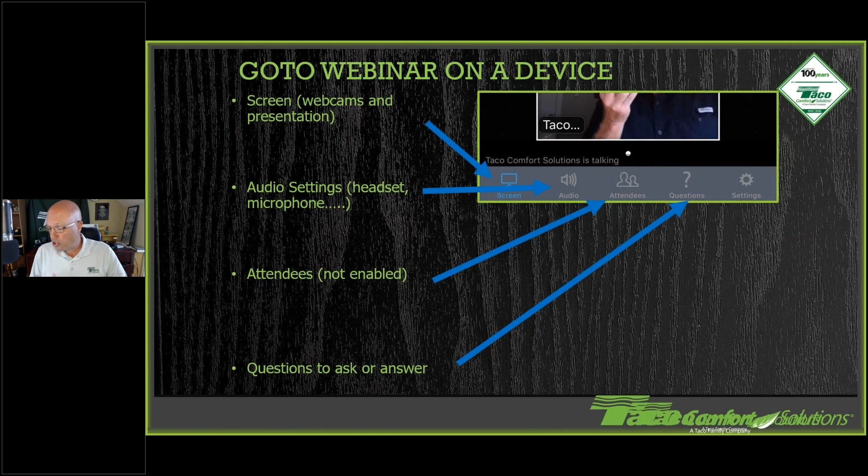So last week, just a quick little review, we talked about eliminating air. And the first thing we talked about last week was, hey, purge, get the air out. That's one of the most important things, is getting that air out of the system. And I showed you a couple of different ways on how to purge and how to pipe the system out.

Second way is pump away from your systems. Pump away from your expansion tanks and your air elimination devices. You pump away from that area. We know, as we talked about last week, this is going to be the lowest pressure in the entire system and also the hottest water. So therefore, it allows air to come out of solution much easier.

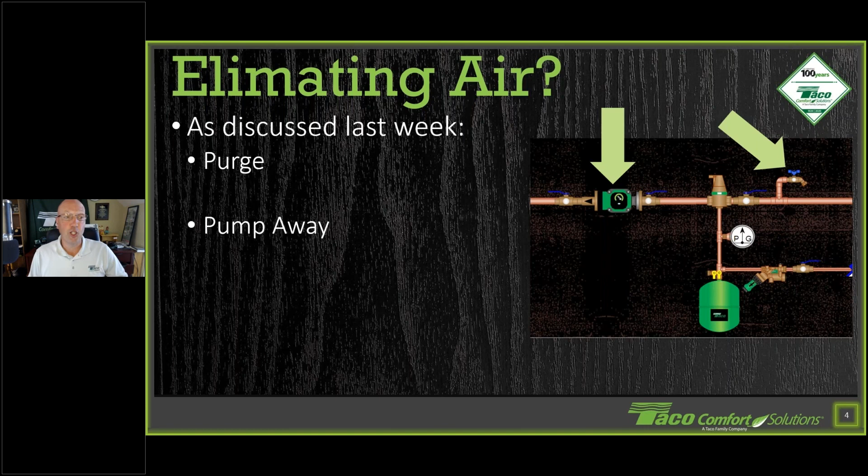Also, we talked about the pressure to maintain in a system, and over pressurizing or under pressurizing the system. Sometimes air problems look like pressure problems, and pressure problems look like air problems. So making sure you've got the proper pressure in your system is also very important.

And then the last way we talked about eliminating air last week was mechanical devices, which I didn't get into. I just said, hey, we got to get rid of it, here's another way. This is going to guarantee and really make sure your hydronic systems are air free. So let's dive into the different ways mechanically that we're getting rid of air in our systems.

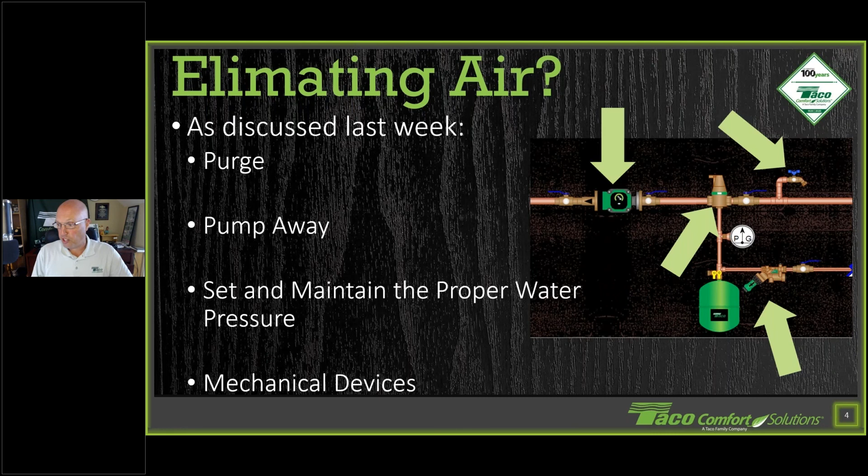All right, so some of those mechanical devices, sorry, are the basic vents. We've seen these around, and we're going to go into detail on these things today. I like to dive into the mechanical parts and pieces and really what's the guts on the inside. So we'll take a look at those.

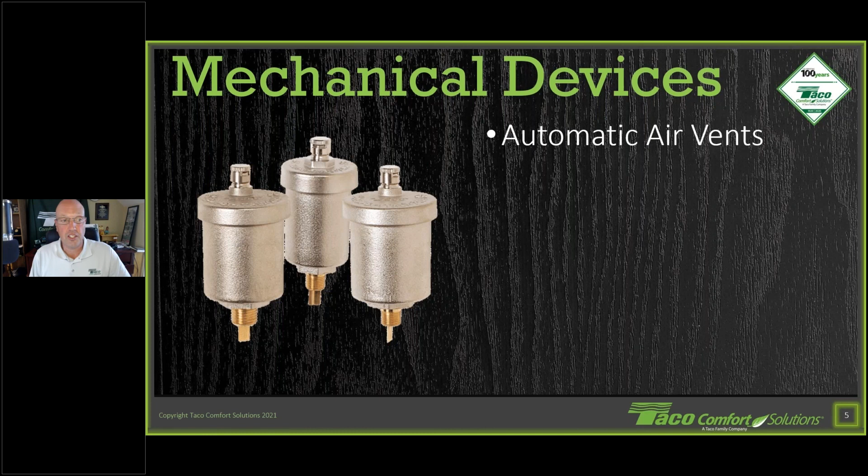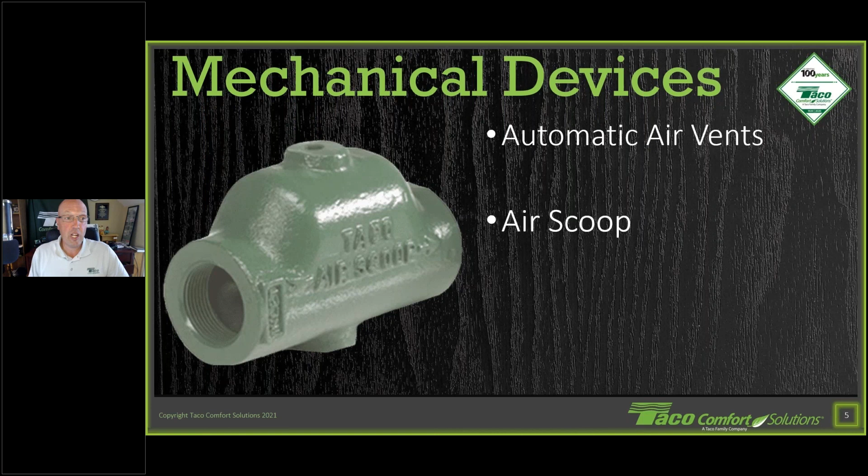We're also going to look at the tried and true air scoop. They've been around for a long time and not going anywhere anytime soon. And then, of course, there's enhanced air separation. A lot of people talk about enhanced air separation as the only way, but not necessarily. Let's make sure we understand what we've got. When you're holding a hunk of metal in your hands and putting it into somebody's house, know why you've got it. That's what we're going to talk about today.

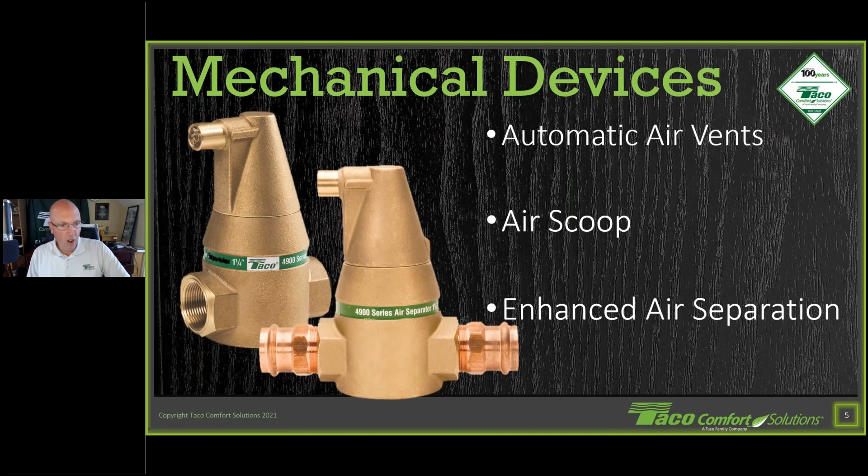All right, so let's jump in and talk about the basic air scoop. It is a basic, simple component, been around for generations. It's a big old hunk of cast iron.

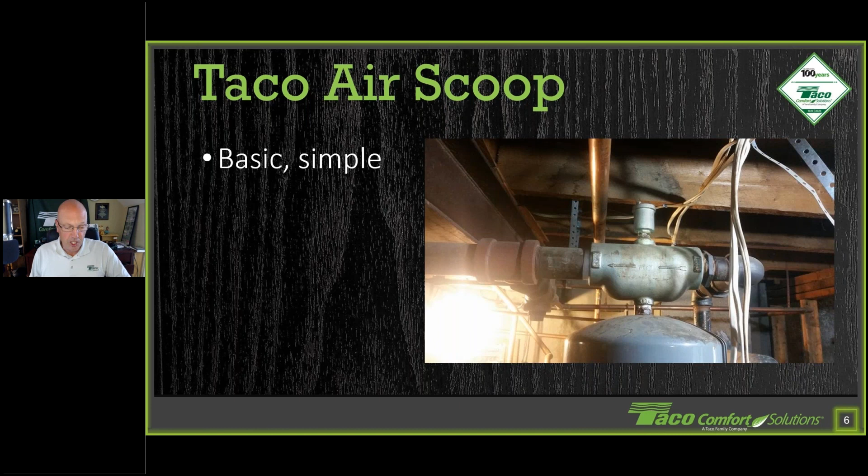All right, however, lots of times they are. Unfortunately, there's a couple of things you need to pay attention to. One is the print that's on there. What I mean by that is there's a design on this thing, and it's not just for the water flow, as you can see here, but you want to make sure you see some words. And when you see those words on the scoop itself, make sure you don't have to turn your head or twist around and contort yourself in order to read the words. Once you can do that, it's going to be installed almost perfect.

But what's nice about the scoop here is there's no moving parts. It's very hard to say, hey, this thing was bad out of the box. Other than a visual inspection of it being smashed or driven over, then you would know, yeah, I'm going to have to return this or figure out why it broke. But no moving parts on the inside here.

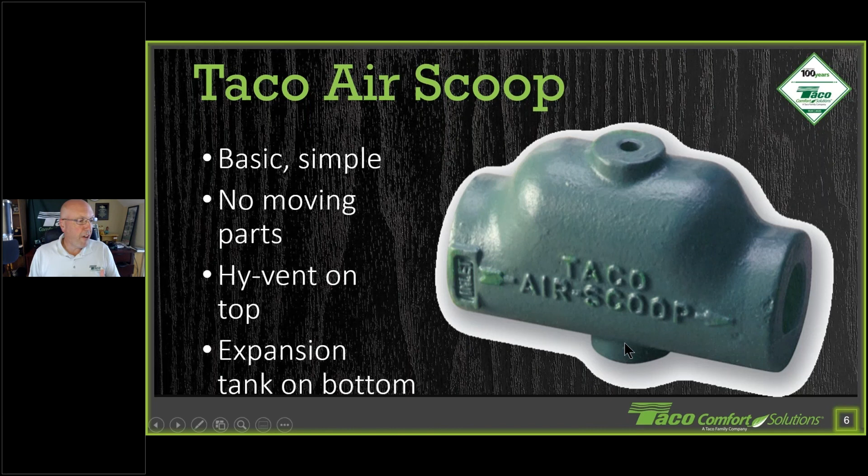Like I said before, the Hy-Vent gets mounted to the top, and we're putting our expansion tank / fill valve tapped into the bottom here. Okay, so very, very simple component, but let's take a look at it in a little more detail.

I want to describe why this shape is the way it is, which we see in so many different air elimination devices. It's that way because of how water flows. Air is lighter than water, and we want to have that air collection up at the top. The other thing we have going on in here are some scoops, and these scoops help deflect and move that air to the air vent sitting up on top here.

But also, when we stop and think about it, as we're moving water through our system, we also have a certain gallons per minute, and a certain velocity too, which is our feet per second. All of a sudden, right past this point, if our flow is going from left to right, right at this point here we have this wide open area, and there's no air in it, because the air has been removed by the air vent. We've got air that's going to be in the water itself, and we want to get that air out. So the velocity of the water has to slow down drastically.

Once it gets right past that corner there, the velocity is going to slow down. Once that velocity drops, air comes out of solution a heck of a lot easier. So this is the reason for this design, why we have this big bulb.

Flipping this thing over upside down now turns the vanes into deflections rather than scoops, and is not going to do the job for you. So that's why you want to make sure it is in the up position.

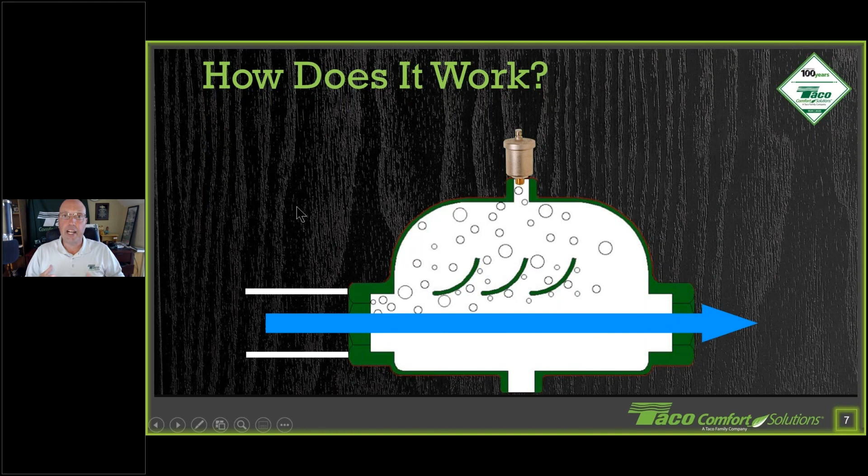Which means we want to have laminar flow of the water in the pipe itself as it enters the basic air scoop. You want to have laminar flow. Turbulent flow, which means everything is all churned up and mixed up, means those air bubbles that could be entrained in there could easily be at the bottom of the pipe here and therefore just scoot right by the scoop itself, and they're gone - back out in the system creating havoc for ourselves. So you want to have that laminar flow. When you have laminar flow, air bubbles are going to float to the top of the pipe and move along and then come into the air scoop itself.

So you want to see that 12 to 18 inches is going to get you that laminar flow. Once you have 12 to 18 inches of straight, uninterrupted pipe, you can get laminar flow, and you get that laminar flow to help this thing do its job.

Many times I see these things - you see the pipe coming right out of the top of the boiler, we put an elbow in, and then there you go, you're done. You throw the scoop in at that point. Well, the elbow is a major point of turbulence - it's going to disrupt and churn that water up, slams into the wall, gets all mixed up. So you want to have that 12 to 18 inches of straight pipe in order for this thing to do its job properly.

So that's about it. The basic air scoop, like I said, has been around for many years. I say 12 to 18 inches because it does also depend upon circulator size, speed, and also pipe size that you're feeding along. If you want to just give a general number, call it 18 inches and be safe with that, and you'll get good laminar flow as you're flowing along into the system itself.

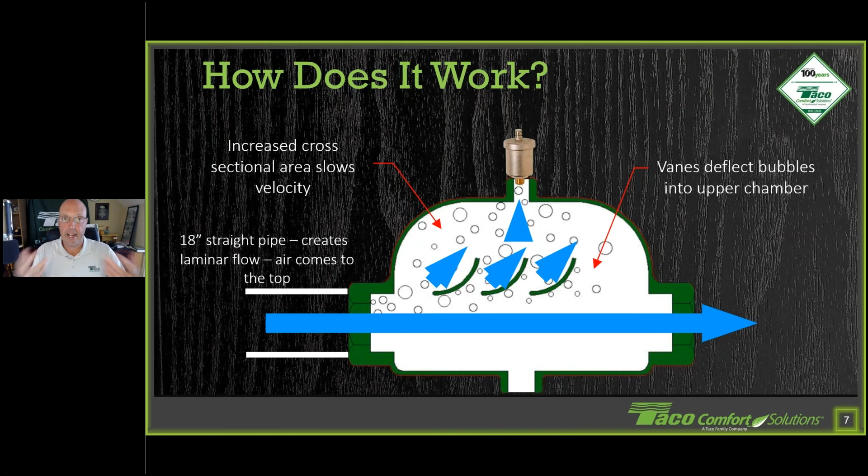So while we're talking about the vents, because you still have to have that automatic vent sitting on top of the basic scoop itself, we've got a wide variety of different vents here, and I like to talk about a bunch of these things. Maybe you haven't - we've all seen them, we've all used them before, but maybe not paid enough attention to them.

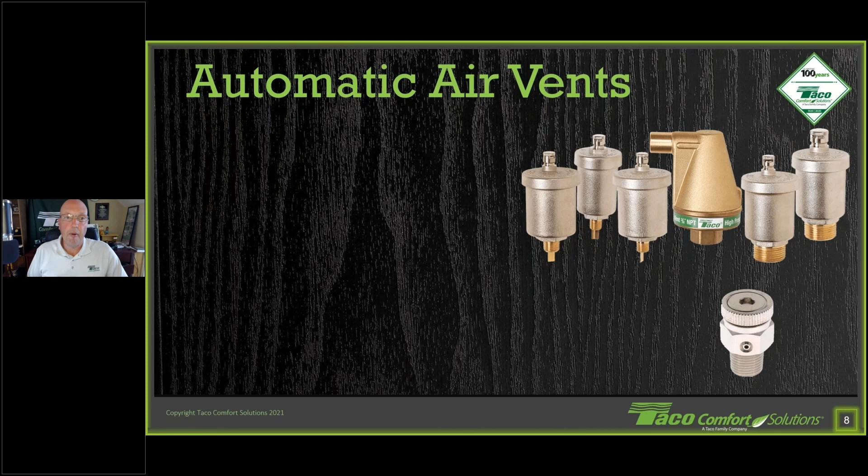So the first thing I want to point out is that we have a basic coin vent, manual operation, can also be automatic too. And I want to show you that hygroscopic coin vent operation on the inside. Then we have our Hy-Vents in a lot of different sizes - we have 1/8 inch, 1/4 inch, 1/2 by 3/4 for individual, different connections, your 3/4 outside thread, 1/2 inch inside thread. And we also have this heavy duty 409 air vent right here.

We use this in a lot of our commercial applications, and also throw it onto our larger air elimination devices for just the vent capabilities. So we'll talk about all of this as we go through.

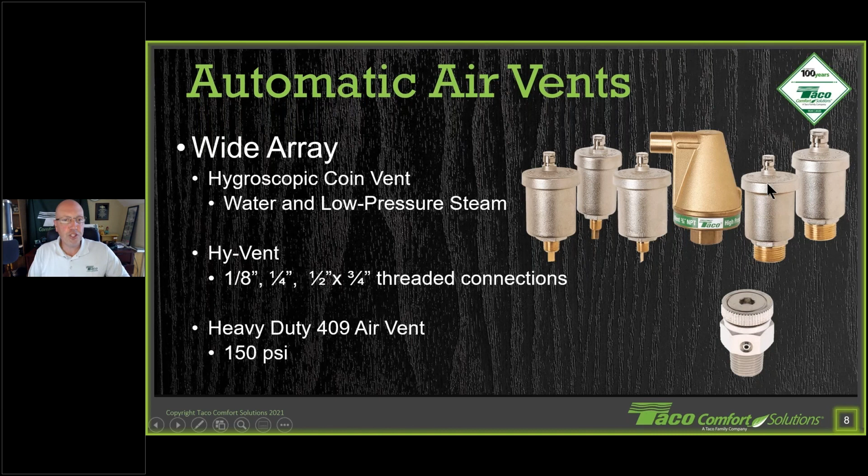First thing I want to point out is the hygroscopic coin vent that we have. This is an automatic vent, which is pretty cool when you take a look at it, but it could also just be a manual open close vent.

One of the things that's important about any coin vents, or if you have a hygroscopic coin vent being used in a system, make sure your system doesn't contain any glycol in there, because this is not looking for glycol, this is looking for a water system. You can also use this with some low pressure steam systems in the house and get that automatic venting going on.

Make sure you don't point it in the downward position. The reason why, you won't get that automatic operation because you're going to see water settle down here, so it's not going to get you the flow or get the air elimination that you're looking for in an automatic setup.

So when you are using a hygroscopic coin vent, in order to make it an automatic operation, you need to have it tightened down. When you close that down, then there are little discs in here, and these discs expand and contract based upon moisture. When they're dry, they constrict, and that allows the air passage to happen.

On say a steam system, it's going to allow air to come in once it dries out, and that's what we want. We don't want that to eliminate that airflow coming in, but it's also going to allow the air to come out. And once they start getting wet, that's when they expand and seal up and keep everything on the inside.

And even in a hydronic system too, if it experiences any moisture, it's going to expand and close off the flow.

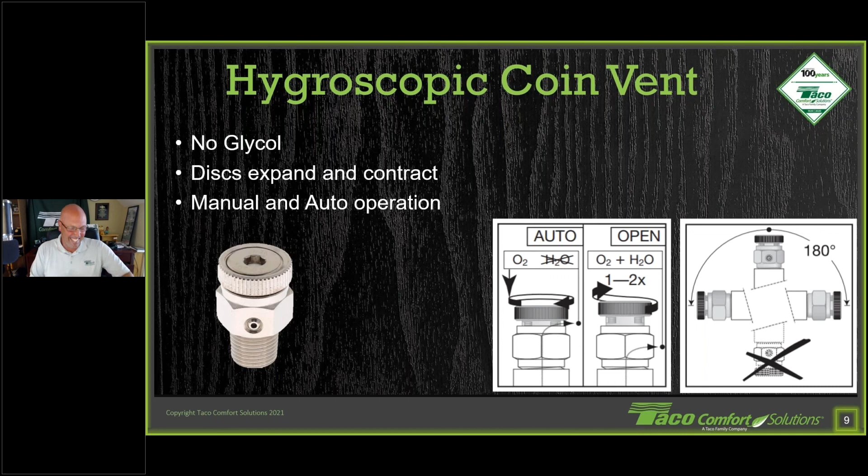Awesome. Anyways, let's jump now into the Hy-Vents themselves. The Hy-Vents themselves, you know, it is an automatic venting system. You got a couple of components that you see in here.

You got the cap, open and close. You want to close that down to shut it off completely. You just need to give it about a quarter turn and it's open.

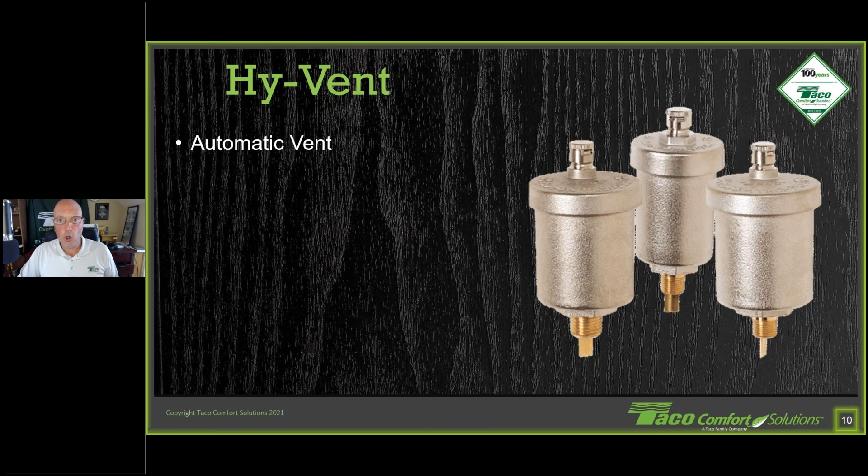Another thing that we have built into these things is what we call a bubble breaker. It's just a piece of metal sitting out of the bottom here, and that bottom piece is for any large bubbles that it might see in the water flow if it's in pipe. If you mount one of these things in a simple T-style system, it's going to try to break up that air bubble to make sure it can come up inside of the vent itself.

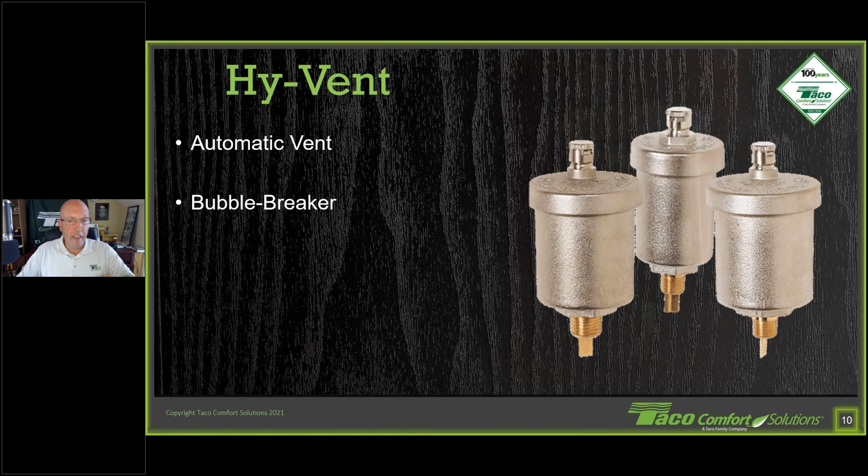And the chamber itself, you know, there's a lot of space inside here. Believe it or not, I'm going to show you a cutaway of the float mechanism that we have on the inside. So it's going to hold a lot of air, quite a bit of air that can be held into these things. And I felt one of the most important things that we have with this thing is that we don't have a Schrader valve.

For those of you that have touched Schrader valves, why do I consider this pretty cool, not having a Schrader valve? Let me know what you think about that for a second. We don't put a Schrader valve in this thing, and I'm going to hold off on that, see if I get an answer on why Schrader valves are sometimes scary to have in a hydronic system. I'll come back to that.

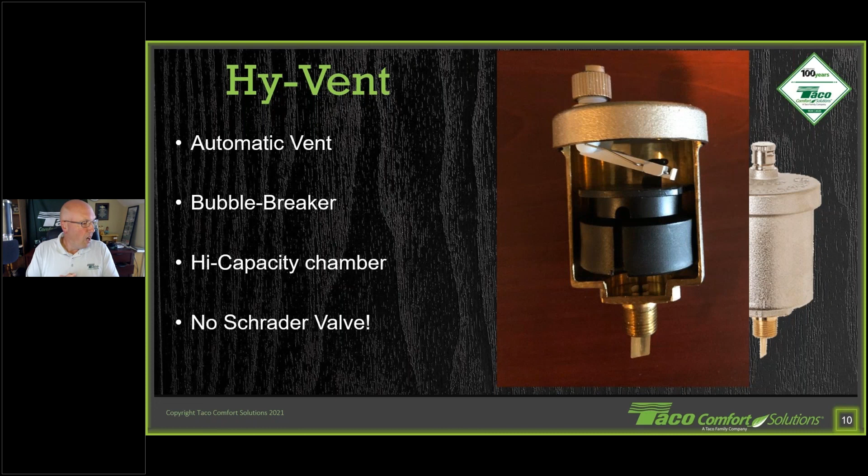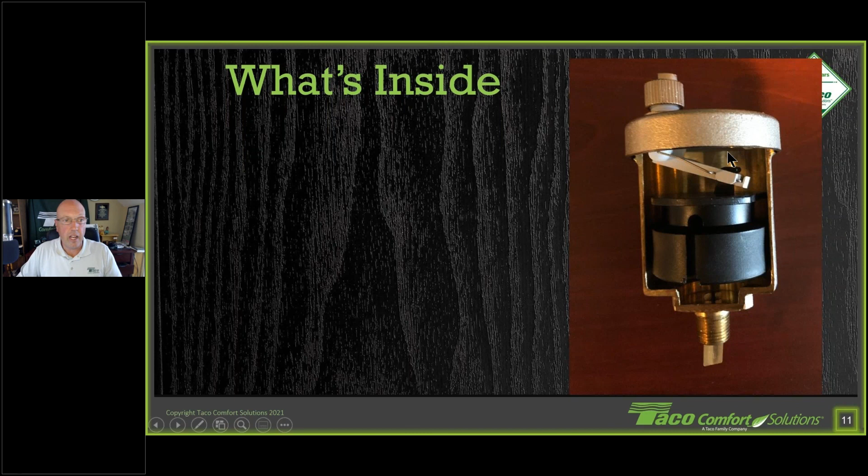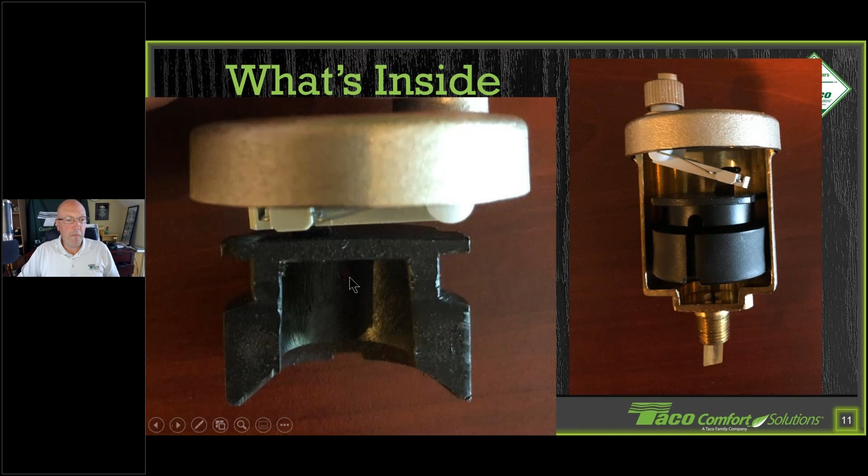So what's on the inside? Like I showed you before, here's our float mechanism, and it actually slides up and down onto this little hinge point, which is a spring connected up here going up and down. Now when I take a look at the inside of the float mechanism, it's not just a hunk of plastic, it's actually hollow on the inside. And being hollow is how it's able to keep that valve closed, believe it or not. It's got a little bit of air sitting up in the top part of this float to help push it up, and when it pushes it up, it makes sure it's got a sealing point.

Now when the center part starts to overfill, there's a little hole that you can see here, and there's also one opposite 180 degrees right through here, that air bubbles will escape out to and then start flooding the entire outside area. And then as more and more air enters in, it pushes down on that vent.

So what is a Schrader valve? I see a question came in from Luis. A Schrader valve is like the valve that you see on a tire, where it's got the pin on the inside. You push it down with your air chuck to put air in. It's a valve, it's just a little pin with an O-ring around it.

For some people, some systems and some job sites, as soon as you touch that Schrader valve to manually let some of that air out that you think might be stuck in here, then all of a sudden it lets the air out. But what else does it let out afterwards? What have you let out after you've hit the Schrader valve when you let a little bit of air out? A lot of times, a little bit of water starts coming out afterwards, and then it doesn't stop. So now, just like you were testing it out to make sure it was good, making sure there was no real major air in the system itself, now you've got a drip on your hands and other things you need to fix.

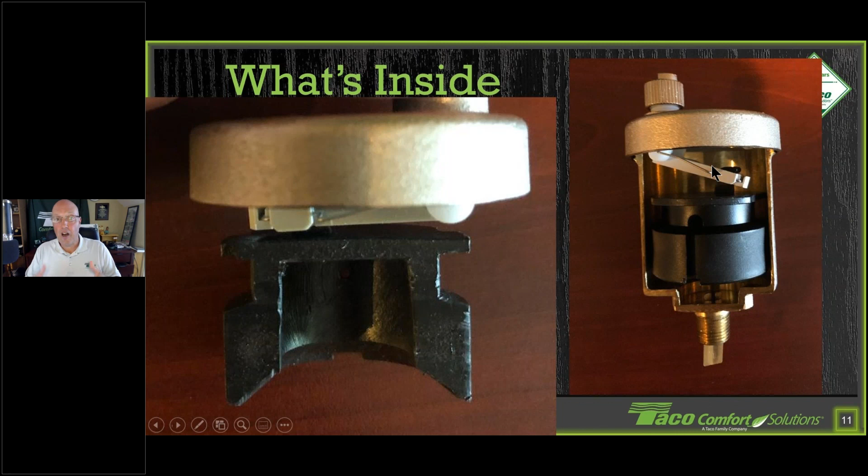That Schrader valve with that little O-ring in there can be troublesome, and you need to make sure you have another vent around in order to replace it. Because one thing to remember is that a lot of the oils and the crud and everything else we have in our boiler system is going to float on top of that water. Since we don't have any real air in there except for what might be in the air elimination device, there's going to be a water-air layer, and a lot of that stuff can settle out and start fouling up any valves that you have. So that Schrader valve is one of those things that's going to get attacked pretty easily.

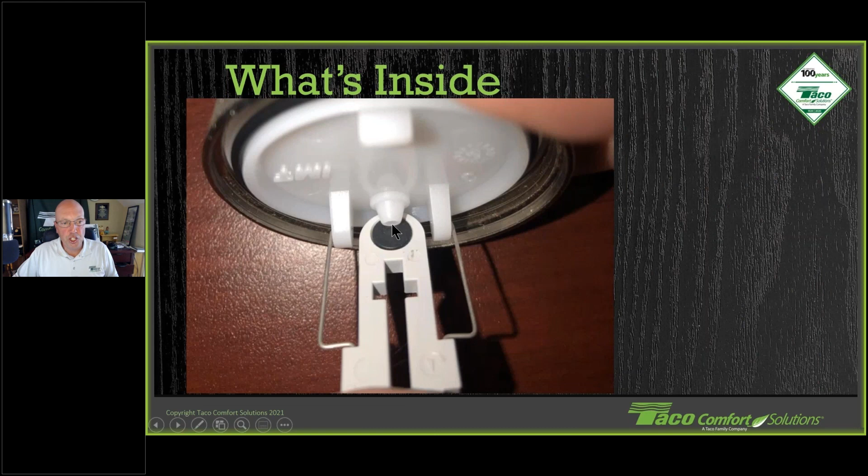So by not having a Schrader valve, it's just a positive shutoff, a rubber disc. I'll show you next what it looks like on the inside, to help avoid those leak points. Okay, so here's what we look at on the inside. This is just a straight-through hole right up to the top here. I can even show you in the camera if we can get a good focus on it - that hole just goes straight through to the cap.

And there's just this rubber seat. So if you happen to have a Taco one and it does seem to be leaking some water out of that cap, what I would do is drop the pressure, drop the temperature in the system, take it apart and find that little mechanism. And there it is - that's just a little rubber sleeve or disc you could wipe clean if it doesn't seal right, since any of that stuff floating in the water can prevent it from getting a good positive seal.

But like I said, that air bubble sticking in the bottom here is going to help that out and try to keep this thing closed as best as possible. Hopefully that helps you guys out and understand what's happening on the inside there.

So I thought it was pretty cool once I started taking these things apart and making cutaways, and just knowing what you've got on a job site is going to help you. Take these things apart—I know a lot of people consider these a consumable and just rip them out and put a new one back in again. Sometimes in 5 seconds you might be able to take that cap off, get inside there, and just wipe it down, and you've got another working system again. It doesn't necessarily need to be replaced every single time, as long as we know, hey, it might just be a little bit of oil, a little bit of something sticking on the top there.

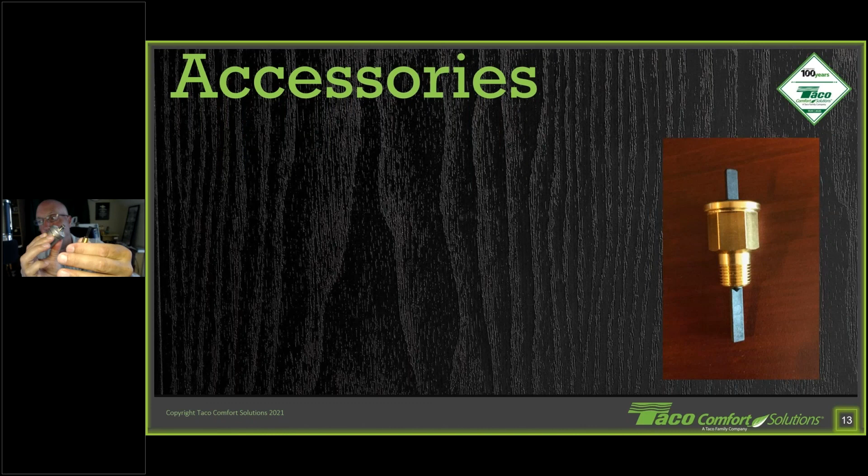Then when you go ahead and install this into your system—again it's got a new bubble breaker, and here is the check valve part. Right now it's pushed down, but if I were to start to take this one out, make sure you leave the check valve in, and as we start screwing down, it's going to give us a positive seal, and you can go ahead and replace what you have. So that accessory can be added along, or purchased separately.

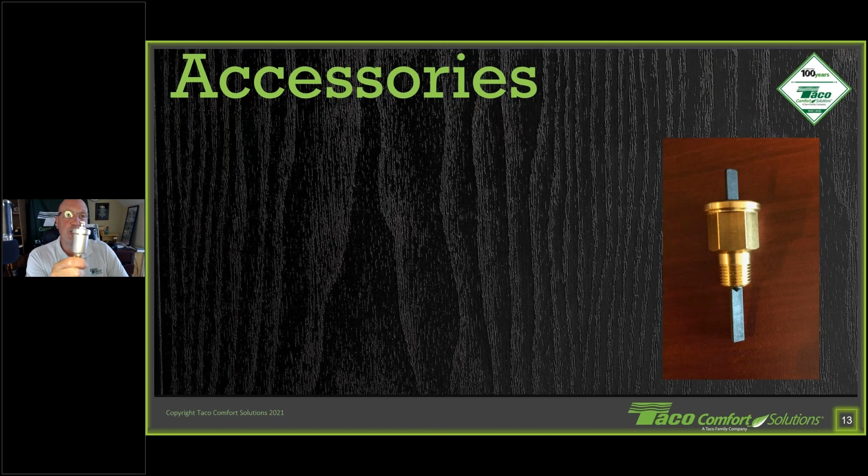Now, another thing that I really, really like, especially when these things are mounted not in the boiler room but someplace else around the house—we actually have a drain connection that you can put here. So rather than worrying about any of those fluids and oils getting in here and keeping the valve mechanism open, you can take the cap off and then screw this piece onto here and transfer over to a hard pipe or a vinyl tube or whatever, and make sure you vent it or drain it away from anything that can cause damage, like sheetrock, when it's in an inconspicuous area you don't see on a regular basis, like if it was up in an attic space. So we do have that.

So you just put this little gasket right inside here and screw it down. Now you've got a 1/4-inch NPT transferred over, and rock and roll and do what you need to do from there. Here you can just see the other side of it—this is what we'd be looking at on top, mounted right down onto that screw mechanism.

Now, I do like to ask this one question: what do you guys like to do with these caps? Do you like to leave them open, or do you like to leave them closed? Something interesting to stop and think about. Sometimes when I do these training classes live and ask that question, we'll get 50% of the room one way and 50% the other—we're almost coming to blows. So being that we're online, hopefully nobody's coming to blows, but what do you like to do with that cap is what I'm asking you out there. So tell me, do you like to leave it open or closed? And I like both—how's that for an answer? That covers pretty much everything.

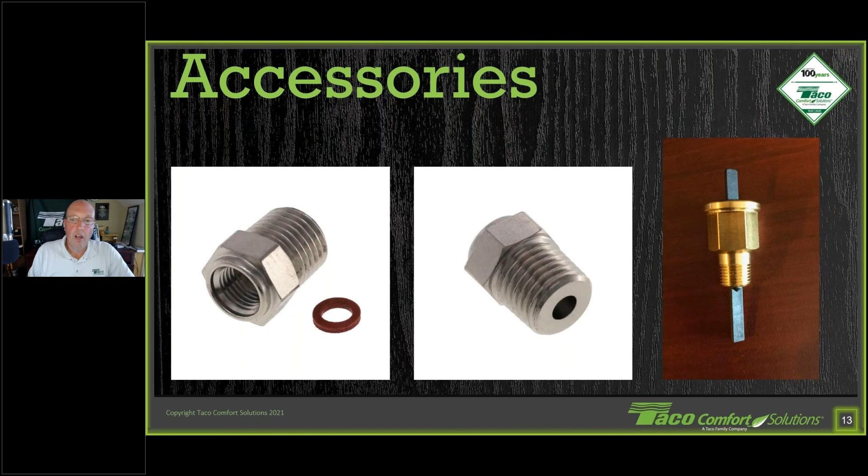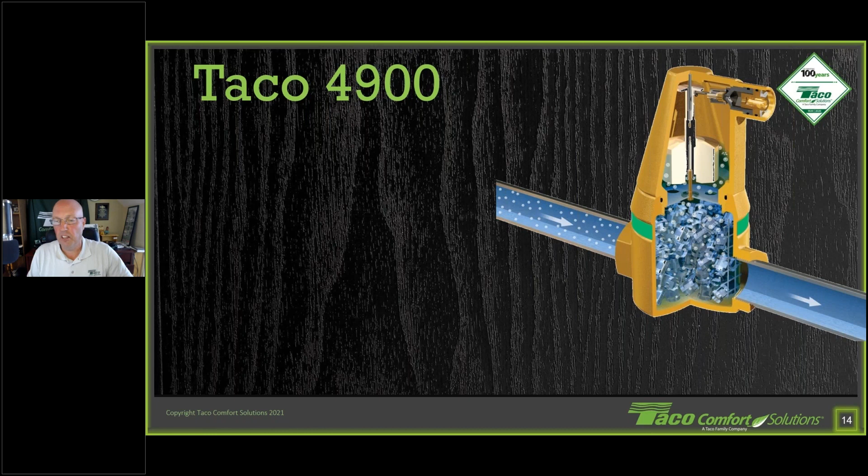All right, as we move along and jump into the 4900, the Taco 4900, our enhanced air separator. This thing is just amazing in trying to eliminate the air. It's going to pull out so much air because of the designs that we have in here. Again, we have the big cavity, the velocity slows down, and air comes out of solution a lot easier at that point. We also have stainless steel mechanisms, parts and pieces on the inside there.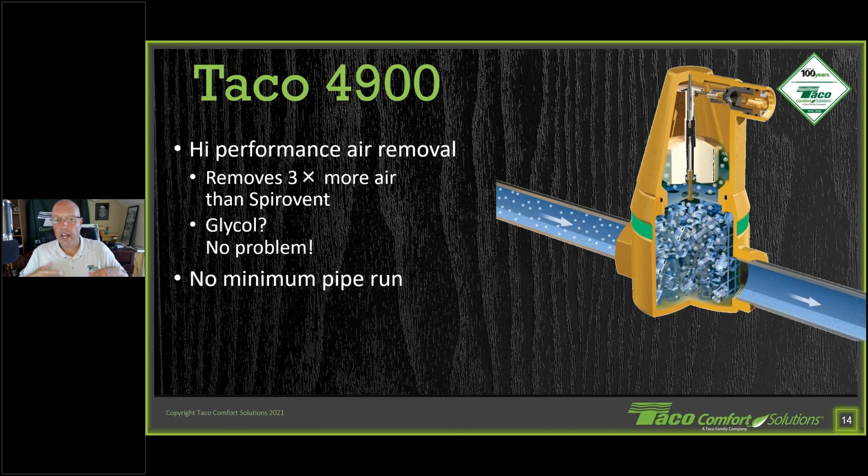So if you have a glycol system, we don't have any worries over time. And what's also nice about these things is, one, there's no arrow on it, not like our basic scoop. There's an arrow there, and the reason for the arrow is to make sure that you've got your scoop in the proper direction. But here we also have no arrows, and we also have no minimum pipe run.

You don't need to have that 12 to 18 inches of straight pipe in here, because one of the things that we've done is added these Pall rings on the inside. We've added in a collision media, which means air is going to collide with these Pall rings. These are stainless steel rings on the inside, and the water can change direction relatively quickly inside the chamber.

But then the air bubbles are not going to keep up with the water moving to get to the other side. They collide with the Pall rings. Little tiny air bubbles glom onto those Pall rings, because now we've got a lot of surfaces on the inside. Then two little tiny air bubbles combine next to each other, you start getting bigger air bubbles, and then the air floats to the top and is let out by the venting chamber up top. So those Pall rings really, really help get the air out fast and easy.

These things are worth their weight in gold. How many people really, truly enjoy purging? Hands up. All right, and if you raise your hand, thank you, if you did that sitting there by yourself. Nobody really does enjoy purging, right?

What I like about putting in an enhanced air separator like this is that you burp the system, get some basic water flowing into the system itself, and then let this thing do its job. It's just going to continuously pull that air out of there for you. And take a look at it, we have very, very high CVs here, so very minimal pressure drop that you're going to see. Same thing with the basic scoop, it also has a very high CV. I don't remember those off the top of my head.

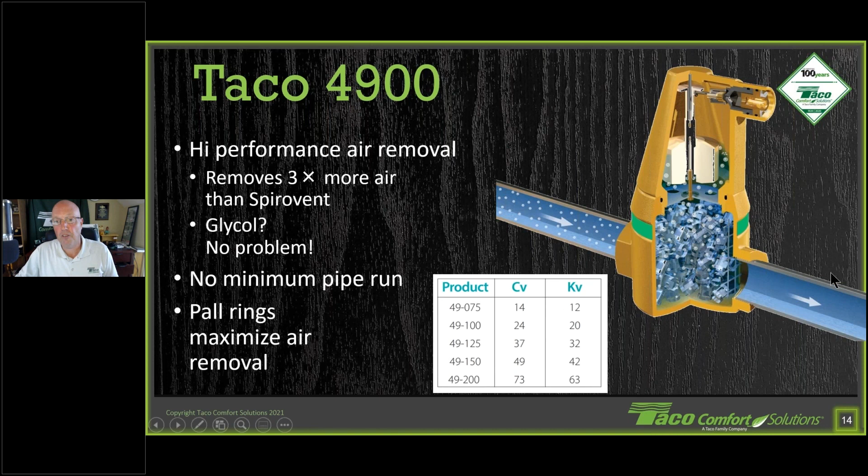We roll the steel ourselves, and we have the basket of these Pall rings that get included in there. So here you can see a little bit of that Pall ring itself. It's just some stainless steel with some tabs that are bent around. The little air bubbles enter the inside, and they're just laid in a basket. So there's lots of different openings on where the air comes in, and then they get larger and just float themselves out.

So as you can see here with this little animation that I got going on, you can see how the air comes out of solution, pushes down on the vent, and the valve opens up to get that airflow again. And how'd you like that, JB, huh?

That's a new addition that I found. That's pretty cool. I like that. I like that.

So, looks like a dragon. They're really going to pull that air out fast and easy.

It is amazing as you're cleaning tools up for the day. I like to jack the pressure up in my system as high as it'll go when I start. And this thing is going to start just hissing out that air. As you're cleaning up and putting things away, you just keep on hearing it. The pressure starts to drop in your system, and then you get it down to your working pressure when you hear it not really hissing any longer.

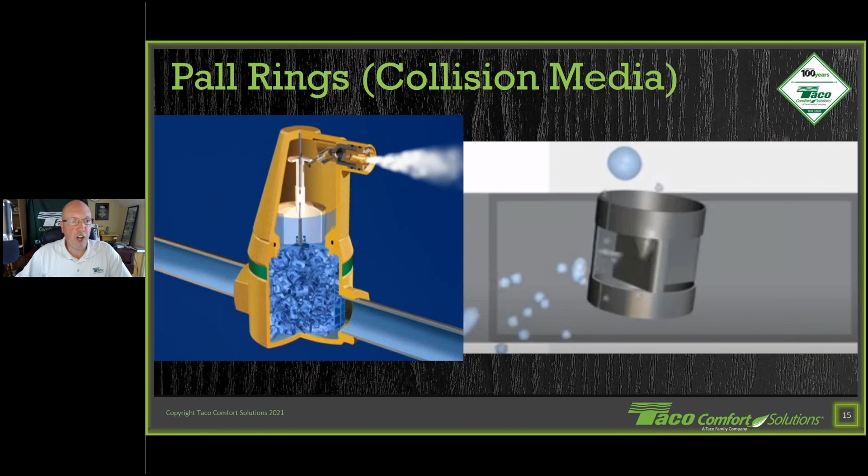So let me talk to you about a couple other things with the 4900, which I think is just also some really cool designs that we put into here. So the first thing is this conical shape. Why do we have that conical shape sitting up on top? So many of them out there have a flat top, basically a tube sitting there, but we designed it to have this conical shape.

Really important, remember what I was talking about with the 400 style vents. Why don't we have a Schrader valve in here? Because we don't have the cleanest water possible. Same thing here. Same thing here.

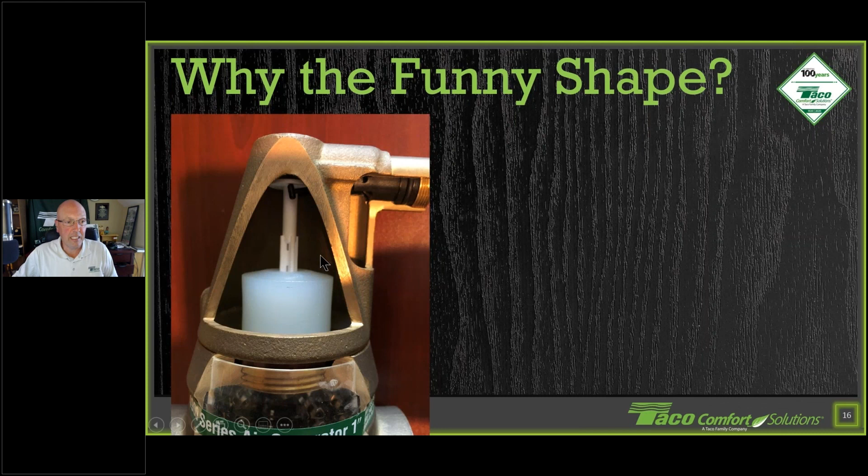The reason for this conical shape is to actually leave more distance between the surface level of the water to air to the valve mechanisms that we have sitting up on top here. We don't want to get them fouled up. By getting them fouled up, we're going to have leaks, it's dripping, things like that. It won't get a positive seal, or it may not positively open to let enough air out. So by having that conical shape in there, we're still going to leave air in here, but we just create the distance between the water air level to the mechanisms a little bit further away.

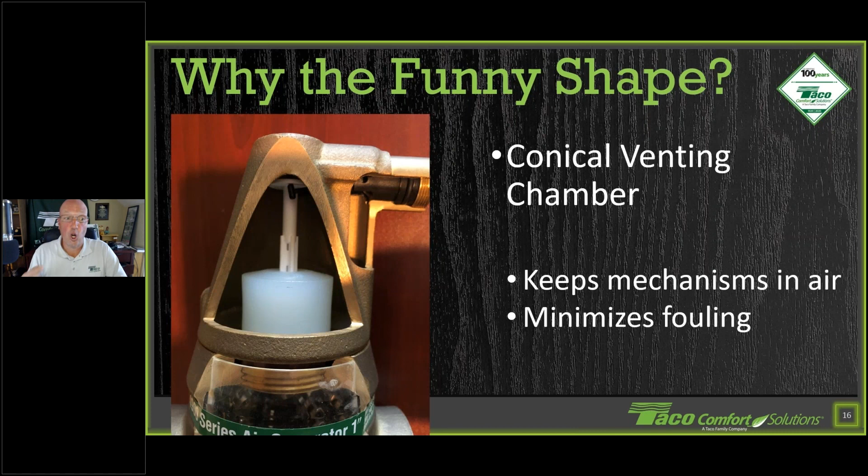So that's why we have this weird shape to it. It's not just to make it look different. It actually serves a major purpose that I think is really critical and gives these things really, really long life behind them. A couple other cool things that I want to point out that we have.

If you noticed in a basic 400 vent, you want to leave these things relatively parallel and perpendicular and stuff like that. You don't want to have them too cocked around, because now your float mechanism might end up riding along the brass on the inside in there. And if it's got too much of an angle on there, it may not move properly.

Very inexpensive devices. Like I said, a lot of people consider these consumables. So what we did on the inside of this one here is that we actually have a couple of guides. So you have a guide here that's going to hold everything in place, that allows the float to go up. And then we also have a guide down here on the bottom that's on top of the basket of your Pall rings to help the float also just go up and down, so it's not going to bind or get stuck anywhere.

So a little bit of extras that we've added to make sure that if you don't have it perfectly level, that it's going to still go up and down and do what it's supposed to do. I felt that's a really cool design once you really dive into it and take a look on the inside.

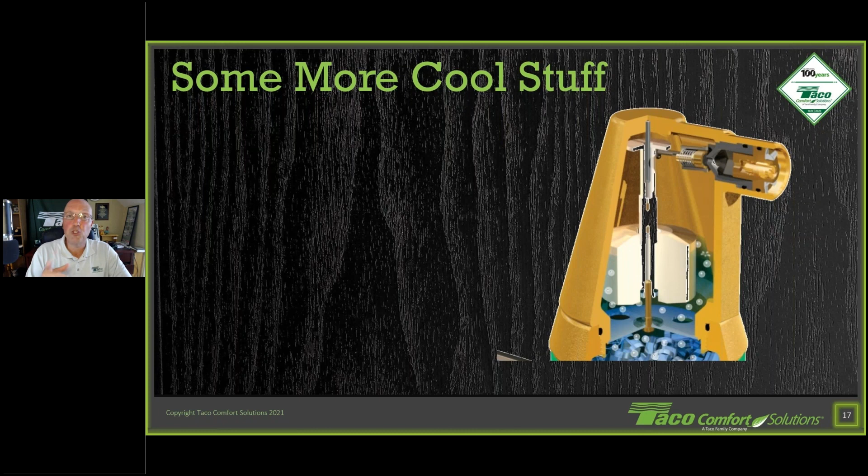And then the other part that I thought was really neat and interesting, underutilized, and people don't know it's there because you didn't look at it - right here on the end, we do have a positive shutoff. Just get yourself that little screwdriver that we have.

I think I got mine right here. There we go. All right. Get yourself your little screwdriver. Tighten that down and you've got positive shutoff again.

Again, a big chamber to hold off some air, that holds that air inside there, but you can shut it off. I like to shut it when you're starting to do that initial purge, because otherwise this thing starts bouncing up and down. And when it's bouncing up and down, it's spraying out, in and out, in and out. And you're going to churn up a lot of that water on top in here. And of course, that's your initial fill, which has the dirtiest water in the system.

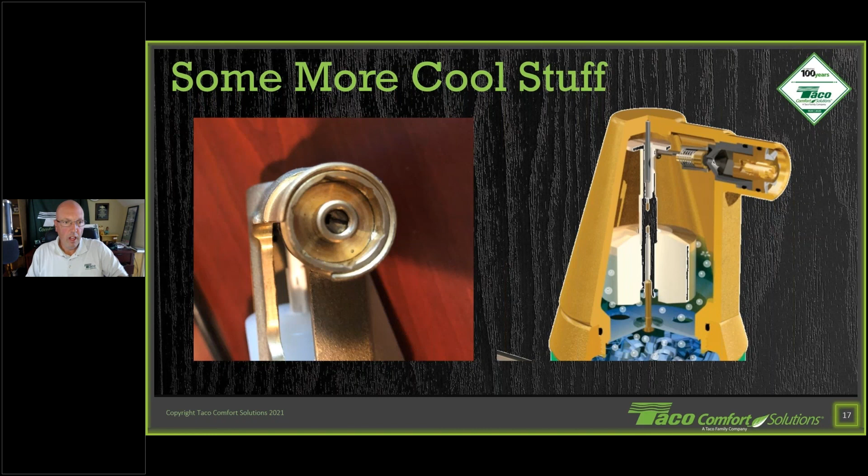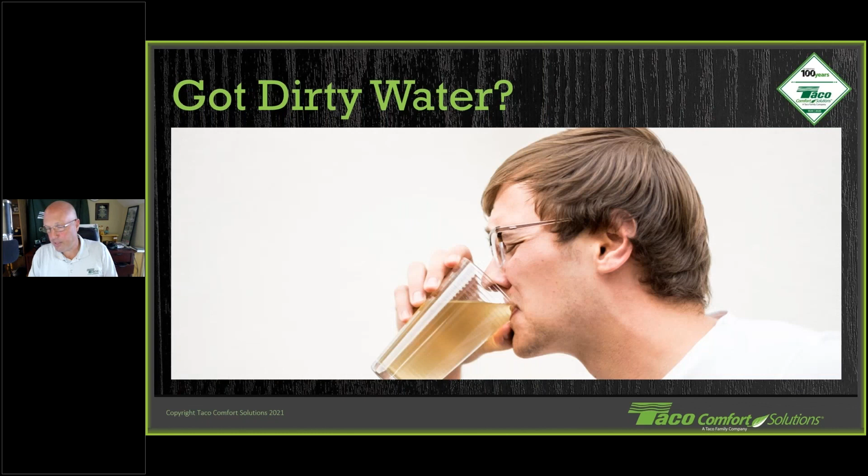All righty, so now as we end the air elimination side of things, we're going to jump into the water filtration side of things, cleaning up the water on our dirty water systems.

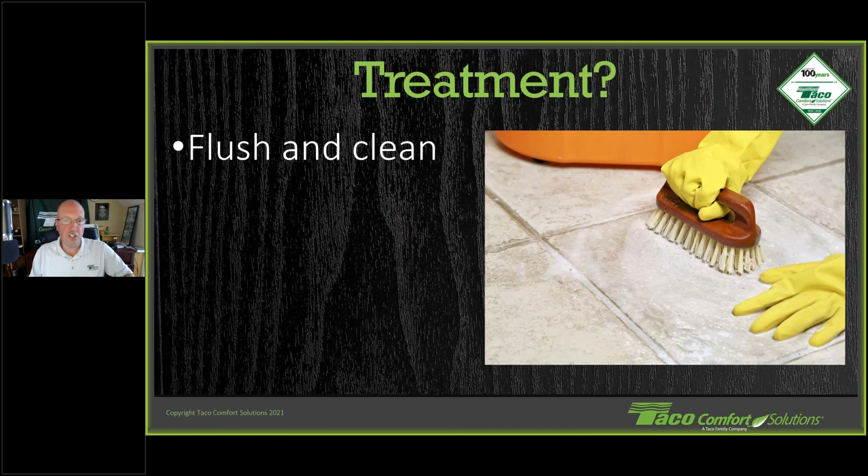We talked about this last week, about what do we do if we end up with dirty water. We saw that it affects our boiler efficiencies, it could affect component life, a lot of things that dirty water is going to affect. Whether you're looking at cast iron boilers or your wall hung condensing boilers, even more so, boiler technology has changed, so it says, all right, we need to flush and clean our systems.

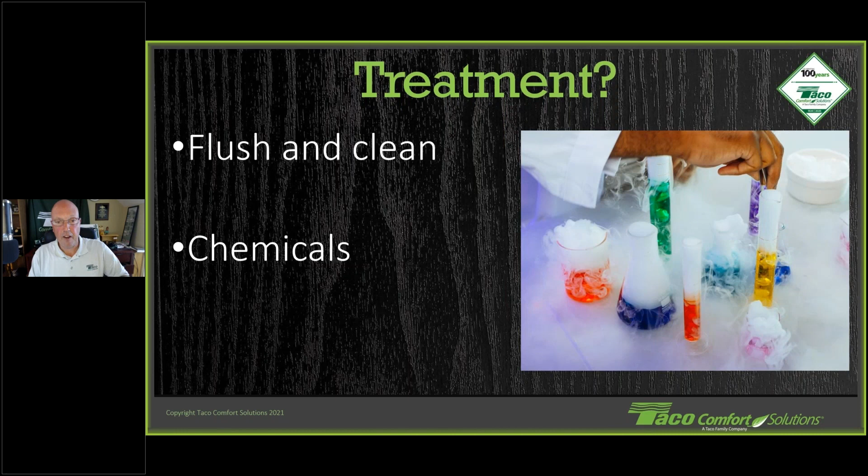There's plenty of chemicals and a lot of manufacturers out there that make some really high quality stuff to really clean out your systems, whether they're new or even older systems. And then of course, there's the mechanical removal, which is going to continuously treat it for the life of the system. That's the important thing: flush and clean with chemicals is usually day one. The mechanical removal is what makes sure it stays clean after you put all that time and energy into doing it first.

Now one of the things about flushing and cleaning a system: how many people here, and please be honest, have taken a brand new system, filled it up with water, purged all the air out, got it all done, stopped, opened all the valves, drained it, and did it again? Come on, raise your hands. How many people have done that? Well, not intentionally. I've done that by accident, but never intentionally.

Right, oh yeah, that's when you filled it up and you're like, oh, that one's got a couple of joints that are leaking on you. Yeah, exactly. No, actually, if you take a look at a lot of the boiler manufacturers' manuals, that's what they require you to do. Cast iron, ModCon, they want you to flush the system down. At that point people are looking at you like, wait, I just filled it up, why do I want to drain it down again? So flush and clean is actually one of those things you need to do with every system.

But the mechanical parts here, putting in a magnetic dirt separator is going to help eliminate a lot of that stuff. It's not going to eliminate the requirement from the boiler manufacturers. Still do what they want you to do, to make sure that boiler is going to live a long life and also meet the warranty periods that they're looking for too.

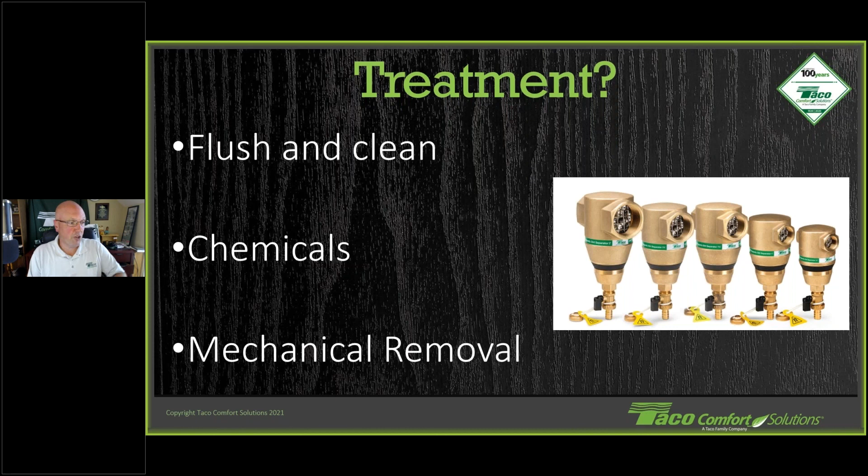So we have a couple of things to enhance the dirt separation out of there. And it looks, if you take a look at the dirt separator, kind of looks very similar to the air separator, right? Let me flip that over. There you go. Yes, very similar in design, right?

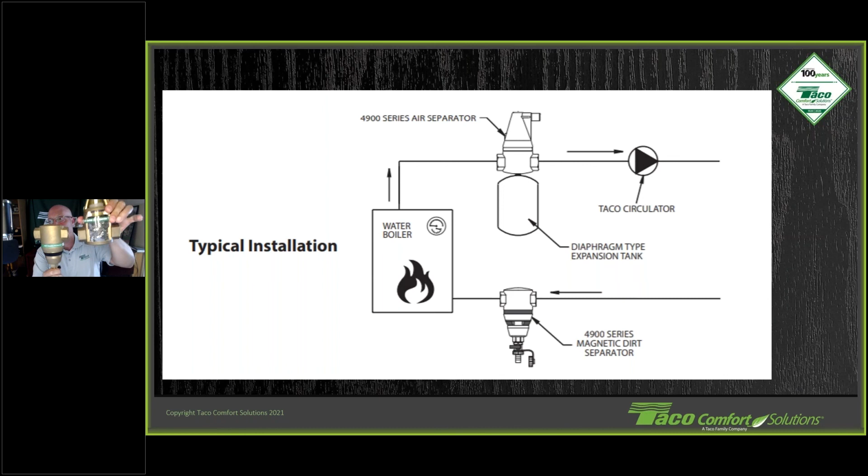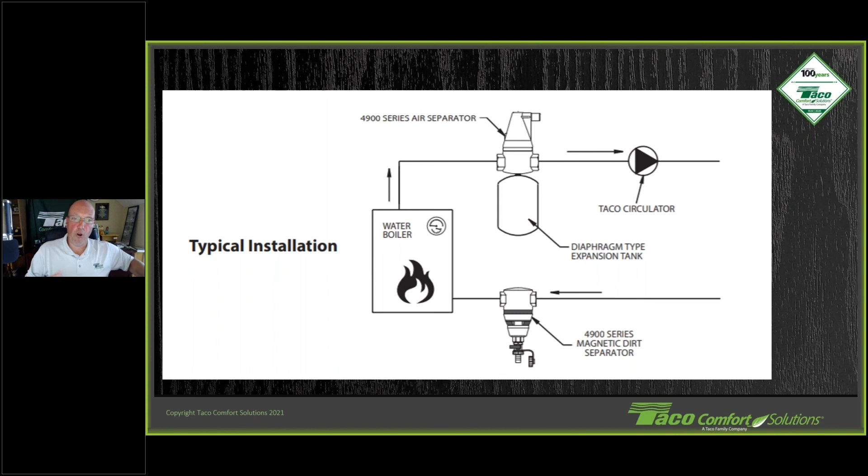Here's your magnetic dirt separator. Here's your air separator. Yes, it is. And a lot of the same technology is from one to the other. So we do have those Pall rings. Those Pall rings are all over this magnetic dirt separator in here. Same idea, those Pall rings that I have. Let me pull that up for you there. Take a look at those Pall rings there in the center. Same basket of rings that we see in there.

That water can change direction really fast. However, the dirt doesn't. Anything that's suspended, any solid that's suspended in the water itself, is going to come out of solution. The velocity drops, same idea - the velocity drops, the Pall rings help. They're not going to glom on, they're just going to make sure they change direction and fall down to the bottom. Okay, so that's what we're looking at there.

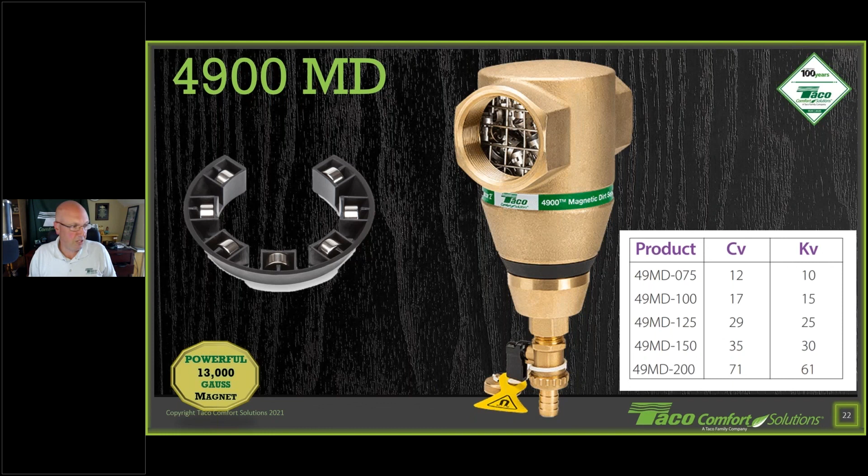And I bet a few of you are like, wow, that's pretty cool - 13,000, wait, what's a Gauss? Yeah, I pulled this right off the marketing page, but I like to talk about Gauss and what is Gauss. 13,000 Gauss might sound amazing, but in the world of magnetic dirt separators, I'm going to pull out a couple other manufacturers that you may have known about or heard of or even worked with. The Fernox TF1, that's 9,000 Gauss.

Now, if anybody has seen a Fernox one, and I've seen it plenty of times, they have this really large magnet, and I go to a lot of the trade shows and I see them picking up my circulators with the magnet. They just take that magnet and bang it onto the cast iron flange and lift the circulator by holding the magnet. And wait, what? There's this 9,000 and we're 13,000 - how the heck? I'm not picking up a circulator with this. The dirt mag is 2,600, the Adey is 11,000. So what is Gauss anyway?

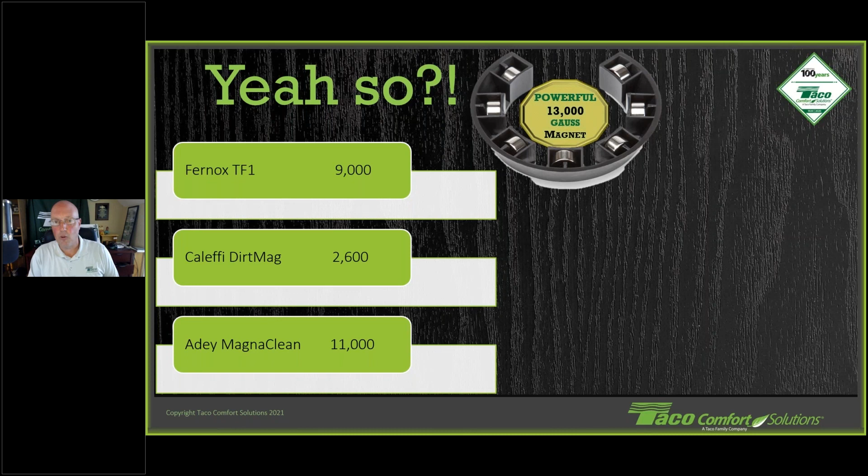Gauss is not magnetic strength, it's flux density - it's the magnetic density of the magnetic field itself. So for example, when you take a look at a bar magnet like this, the Gauss is really low, because the lines, if you notice, are really far apart. But now you go ahead and put north and south near each other, the magnetic field lines become very compact, and therefore your Gauss number starts to go way up. And obviously, when you put the same poles together, they are almost nothing in the middle, but then it's just the standard strength that you see as you get a little further away.

So that's what we look at with this ring. We have these series of magnets all around the outside, so therefore the inside, the Gauss number, the magnetic field lines is very high.

Just because it's a high number or a low number, as long as it's actually getting the iron oxides and the iron components out of your system, that's the most important part.

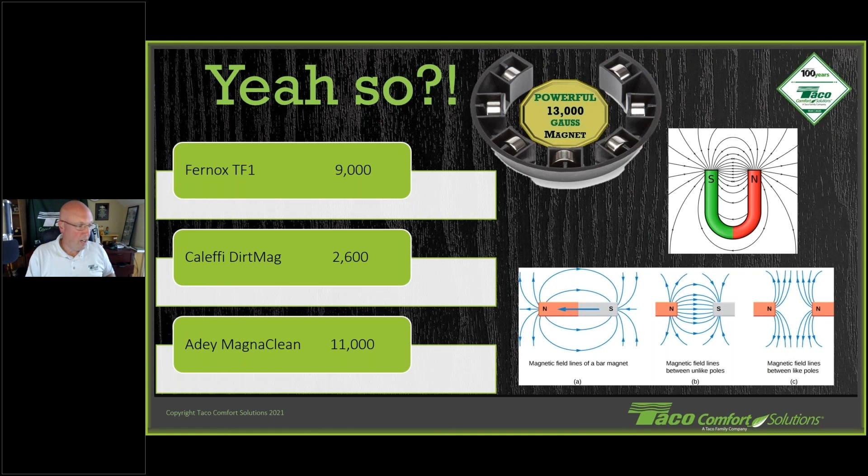The design of the magnet, some of those ones like the TF1 here, when you pick up a circulator, it has to have a magnet that goes in the center, and the field lines, the magnetic flux density, is actually weakened the further it gets away from that magnet. So when you pick something up, why do you have this in your hands and why are you putting it into somebody's system is usually the most important thing. Make sure you know why you've got a particular component out there that you're going to use.

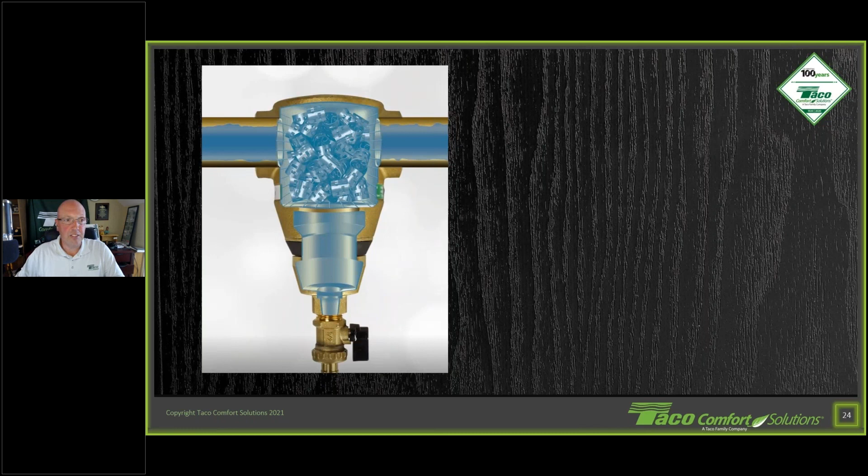Here we take a look at the inside of our system. You see those Pall rings themselves, and we have the chamber down here. The Pall rings, again, no direction, velocity changes, so stuff comes out of solution relatively easy. As it's coming down, any regular dirt is going to continue all the way down to the bottom and fill up the chamber. We do have that magnetic field in here, and the ring itself is going to attract and make sure any steel or iron components stay here in the chamber and don't go back out to the system. It's even going to get that really fine black iron oxide out of the system and hold onto it there. So again, same principles as our air separator.

Excellent, excellent. As I move along, any questions, JB? How are we doing out there? You're doing quite well. Questions have been kind of non-existent since you asked whether people like their vents open or closed. So again folks, any questions, please type them in. This is a good chance to ask a guy who knows what he's talking about what the heck he's talking about. The reason I also ask questions is to make sure we didn't get disconnected. There's nothing worse than a webinar going on with the trainer still talking and to nobody.

So that's the most important part too, I know it's lunchtime and things like that. With that being said, I'm going to continue on, and Dave, just to stave off panic, somebody type in hello just so we know you're out there, just so we're not panicked that we've somehow lost our entire audience. There we go, okay, some people are with us. Excellent, thank you Vic. Now I see them, I just got to move out of the microphone there. I can see them, all right. So I know sometimes I can be very thorough in here and maybe I don't have any questions, but I just wanted to make sure we're still connected to people. I think there was one time John and I were continuing on for about 5 minutes before I got a text message saying, dude, you got disconnected.

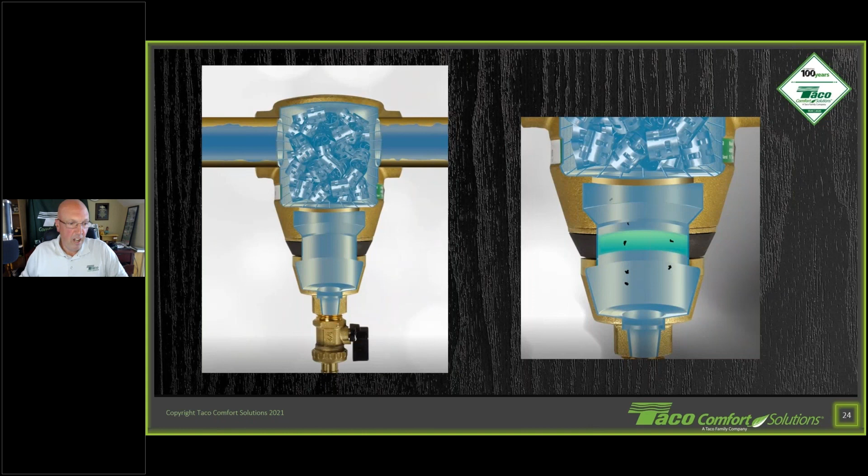So anyways, how to work this thing. Very simple, install it in up to 2-inch pipe size and you're done. When we take a look at it, we do have a shutoff cap, so when it's not being serviced, you leave that cap in place. We do have a barb connection, so you can hook up a hose to it if you want, or if not, we're just going to use it and grab a cup to it.

First thing, when you want to clean out your system, I suggest maybe doing this once a year when you're doing your basic service. One, the boiler doesn't have to be hot or cold, probably easier if it's cold in case you don't have a bucket or anything nearby. Two, most important, turn the circulator off, any pumps in your system should be off, and let the water settle out. We don't want to get it all churned up at the time.

Next, what we're going to do is remove the cap, put the drain on there, make sure your valve stays closed, and then the ring just easily pulls off. There's a little gap in the back here, as you can see in the picture. We're just going to slide it back and it pops off. It's very flexible plastic, I'd say it's going to be very hard for you to break it.

Don't try too hard to break this thing, it's very flexible. We've got some grooves in here to help it flex out so you can slide it back in. So you slide this off, okay? Once it's slid off, now you can go ahead and open up that valve.

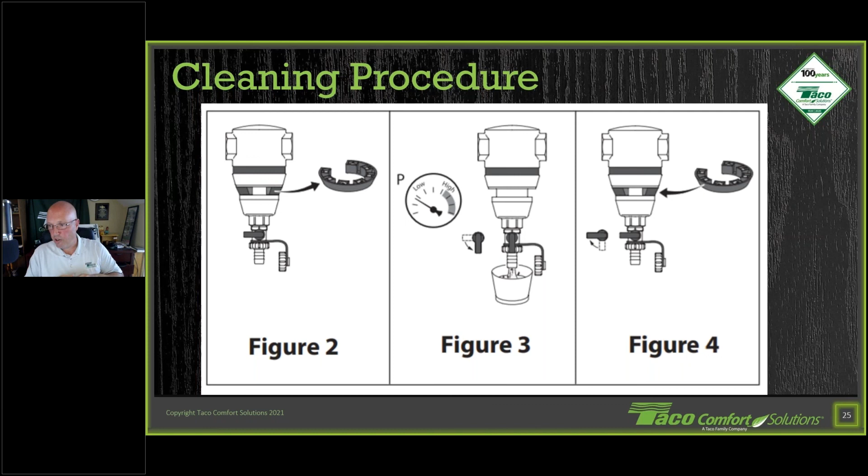3 to 5 seconds, tops, is what you want to do to get any of that dirt that's coming out of the system. Because when you pull the magnet off, any of the iron components that were stuck to it, and the piece of brass left in here isn't very thick, so it allows that magnetic field to pass through, and now it's going to settle down to the valve head, then you open it up and you're done. You purged, close the valve, replace the cap, put the ring back in, and you're done, ready to rock and roll. That's all you need to do. So, very simple system to get the dirt and any iron components out of your system.

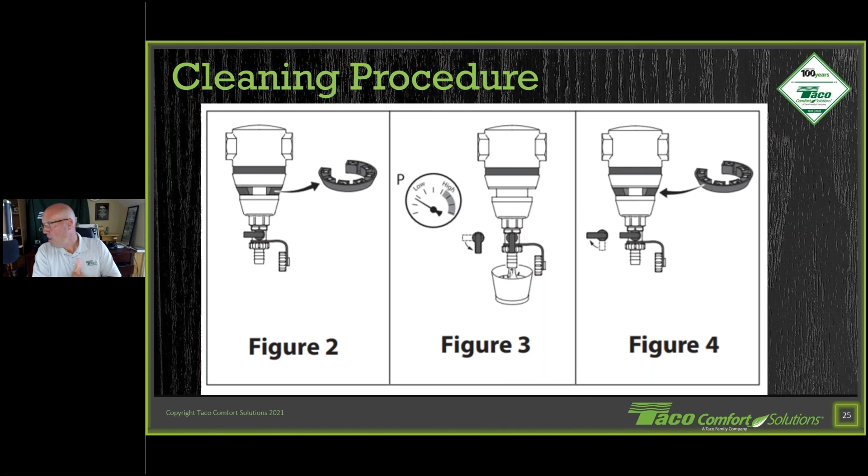So for the Gauss thing there, I thought that was an important point, especially since our marketing department put it right on the front page of the paper. I thought, I've got to do some research on that, because sometimes we just gloss over it and don't pay attention. So with that being said, I am done.